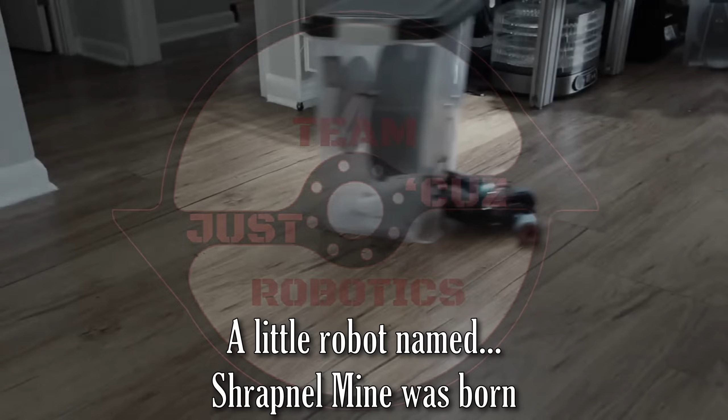Once upon a time, long ago in the year 2021, there was a little robot named Shrapnel Mine. It had a fierce saw blade and a front hinge flipper designed to get under its opponents and slice through their underbellies. But no matter how hard it tried, things never quite worked out right.

When Shrapnel Mine charged into battle, its saw would whir menacingly, ready to tear into its enemies, but each time it made contact, the blade would just scrape, leaving nothing but a few sad sparks. The forks would often get stuck in the floor, leaving Shrapnel Mine stranded and vulnerable.

To make things worse, Shrapnel Mine's battery had a bad habit of dying in the middle of a fight. Each match, it seemed like just when it might have a chance, the robot would slow to a halt, lights flickering out as its energy drained away.

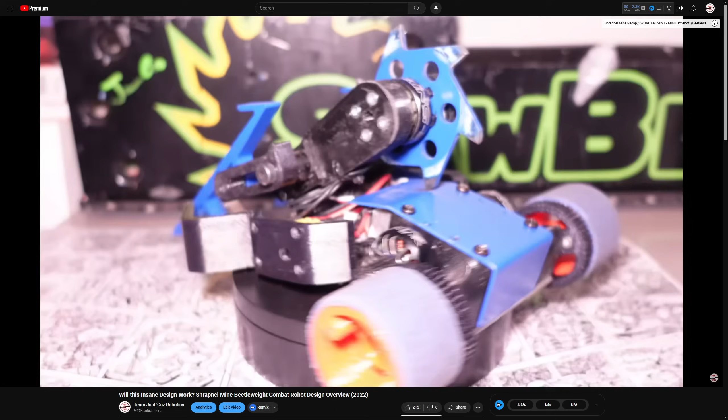After a year of struggles, its creator decided it was time for an upgrade. Shrapnel Mine was given a bigger, stronger battery, and hope was renewed. But with new power came new problems.

In its very next fight, the robot charged in with energy like never before, only for its wheels to be easily snapped off by a single blow from its opponent. No matter how many upgrades it got, Shrapnel Mine never won a single fight.

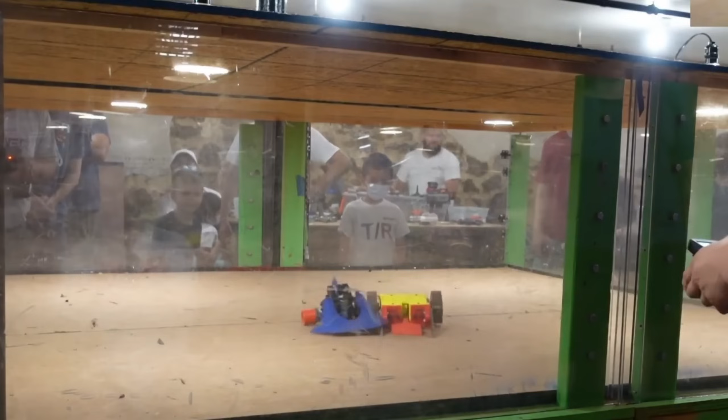But even as its parts rattled apart and its saw sputtered out, Shrapnel Mine never gave up. It knew that one day it would finally land that perfect slice, or at least try its best until the very end. For the past 2 years, Shrapnel Mine was enshrined in a display case just behind. What remained of it sat, biding its time.

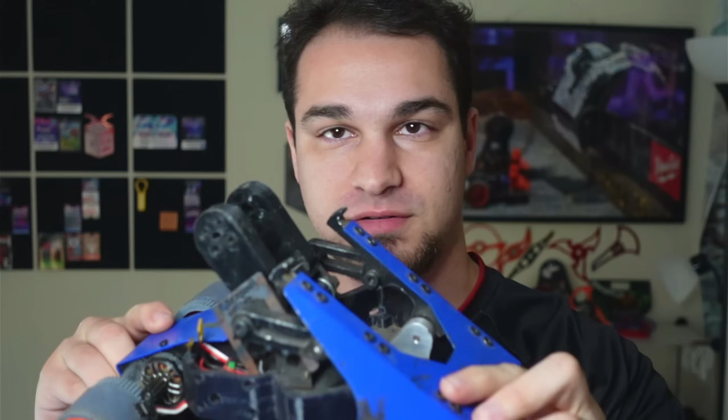But it calls to me. Now, I can be alive once more. You have the technology. You've developed new components, the perfect ones to make a better, faster, stronger Shrapnel Mine. Maybe even one that can get the perfect slice.

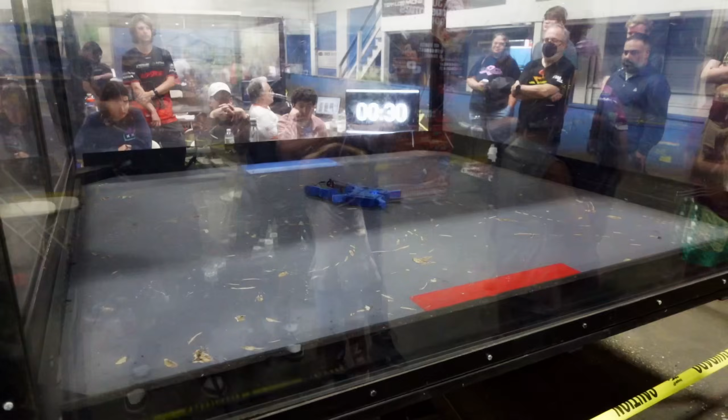But our story today doesn't begin with this version of the robot, but instead with this one.

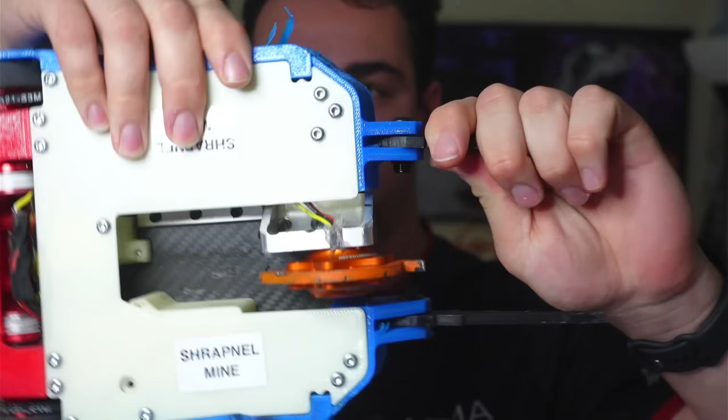Today's video is going to be about the development cycle for the brand new Shrapnel Mine version 2, and how I went from trying to make something like this to something like this. Mostly I'll be focusing in this video on the flywheel flipper mechanism that I tried to make work, because that was what I started out with trying to make Shrapnel Mine V2 into.

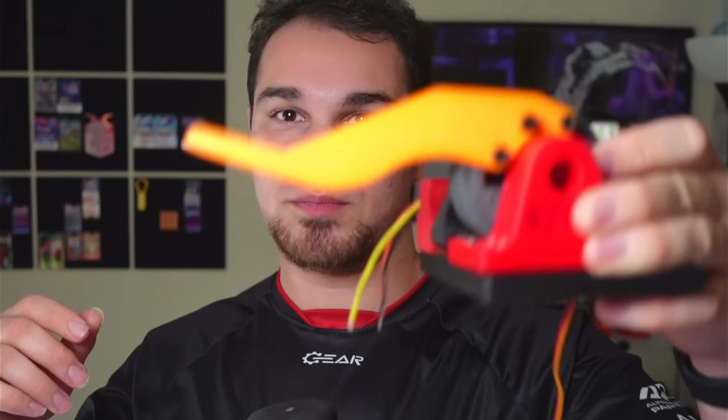My goal was to basically launch robots into the ceiling repeatedly during a fight, but I ran into a lot of problems down this design path, which I'll go over in this video. Then in the next video, I will give a design overview of what actually became the physical construction of the robot that just competed on Saturday, which is this one here.

The punching spinner system was obviously the main feature of this version of the bot, and I'll talk about how I came to the conclusion that that would be a better approach in the next video.

And then, of course, I will have a full event recap for how the robot did at the competition in the third video that will hopefully be out in about a month, maybe a month and a half from now.

So Shrapnel Mine was a successful video idea, but not a very successful robot design. Let me show you. This is what's left of that version of the robot.

It's pretty much the same as the first version, except that I added this steel wedge on the front as an option to fight horizontal spinners, and there's supposed to be a motor with a blade right here.

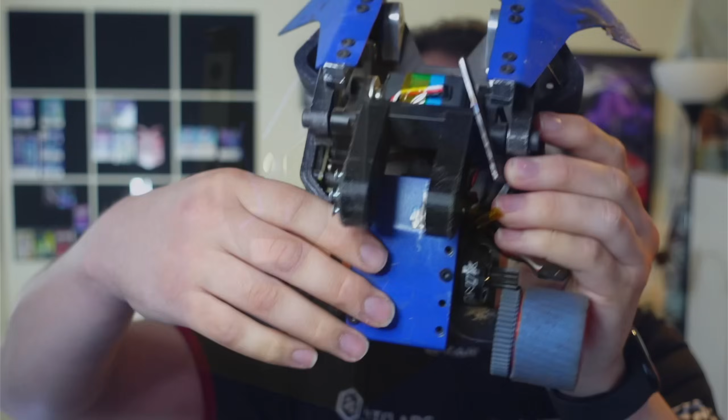The main difference between version 1 and version 2 of the bot was that I upgraded the power system from 2 cells to 4 cells, and I refined a lot of the different mechanical systems in the bot for the drive system a little bit, but ultimately it was pretty much the same as what you see here.

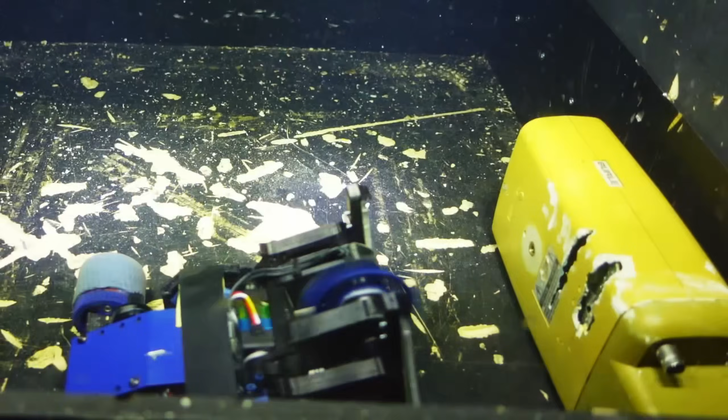The main idea was there was a spinning saw blade up here, and as I pushed an opponent up against a wall, I could pivot them so that their bottom was facing the spinner, and then drive the spinner into their underside, which is usually the least armored part of my opponents.

This front hinged flipper plus servo arm combo was kind of complicated and fragile though. I beefed it up a ton more than I needed to, and it ended up making the front of the robot super heavy, and with the wheels in the back, it never really drove that well because the weight distribution was so poor.

A control robot really benefits from having more than 2 wheels, I've found in most cases, so when redesigning the bot, I definitely wanted it to be 4-wheel drive.

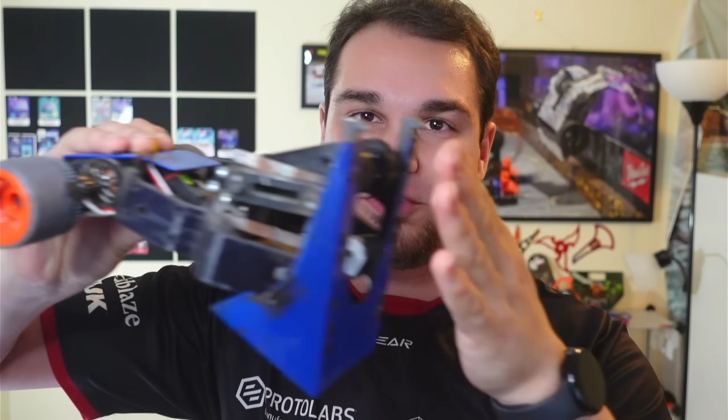But I also wanted a completely different weapon system because this one didn't really serve its purpose all that well. When you push an opponent against a wall and try to saw through the underside, you're completely limited in how much pressure you can apply with that saw blade by the amount of traction the drivetrain can get. And with all the weight in the front and the wheels in the back, that was not very much.

So it didn't really do a whole lot to opponents that weren't made of literal cardboard and tape, which thankfully at least one of its opponents was.

My last video, released about a month ago, was about how to design a combat robot kinetic energy spinner weapon system. And in that video, I talked about the importance of a bite to deliver all the energy that your spinning weapon can carry. With Shrapnel Mine's design, I had a 6-toothed blade that was kind of a combination between

a saw that cuts and a blade that impacts the opponent, but it was kind of the worst of both worlds. So when I redesigned the bot, I knew that I was going to need fewer impactors and a way to deliver energy a lot more efficiently.

This kind of led me down a completely different path, which was the idea of a flywheel flipper. The whole concept behind a flywheel flipper robot is that you spin up a flywheel to store kinetic energy, and then you dump it into your opponent 100% at once by having an arm that just launches them into the air and makes their whole robot hit the ceiling or something like that.

I thought it would be really, really cool to be able to put on entertaining fights where you could consistently throw an opponent into the ceiling multiple times per match.

And even though it's a completely different type of weapon than the kinetic energy delivering or saw blade cutting actions that the first Shrapnel Mine could do, I thought it would still be befitting of the name, as the idea of getting under somebody and popping them into the air is very similar to the Shrapnel Mine actual World War II weapon, which was a landmine that popped out of the ground and then exploded, shooting shrapnel everywhere around it when somebody stepped nearby.

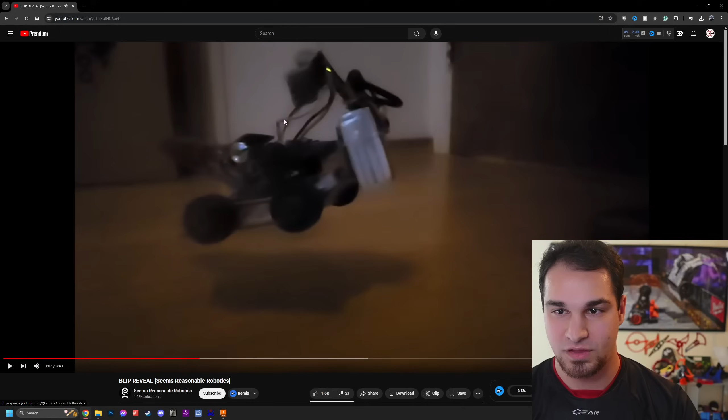Blip, of course, is a 250-pound combat robot with a flywheel flipping mechanism, the complexity and cost of which far exceed anything I'm personally capable of making, but he also made a still very expensive and complicated 3-pound version that was named Moonshot. So this right here is basically as far as Moonshot ever got towards competing in a robot fight.

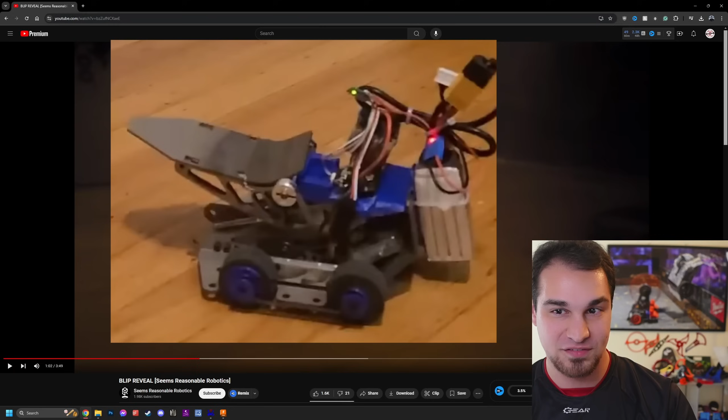As you can see, it had no actual armor, the battery is just lying on the floor there, but it did have a 4-wheel drive system and a flipping system that could launch a robot pretty damn high up.

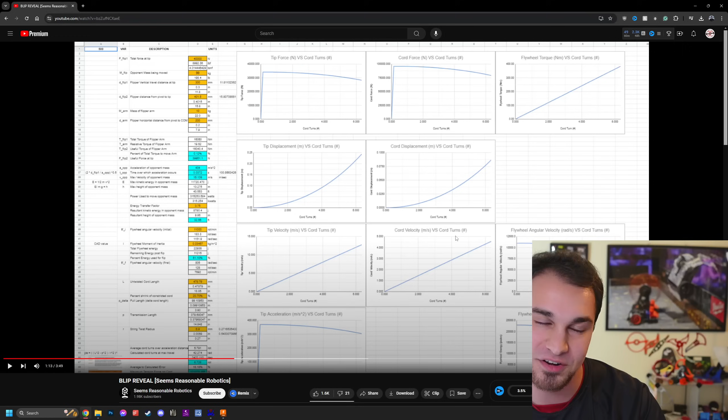But I can tell you some of the key elements that differ from my design versus his. So why didn't I just copy what Aren Hill did with Moonshot?

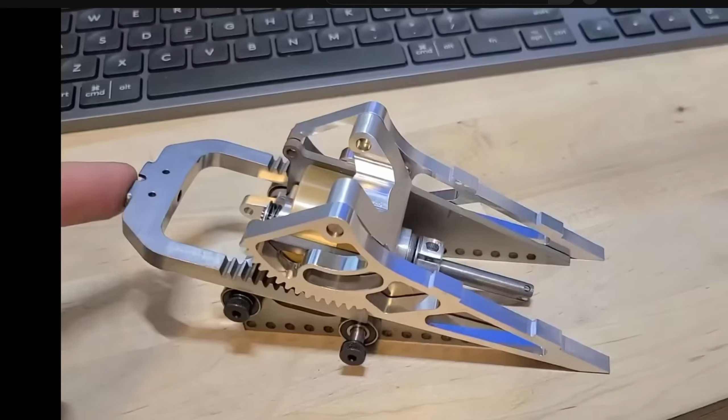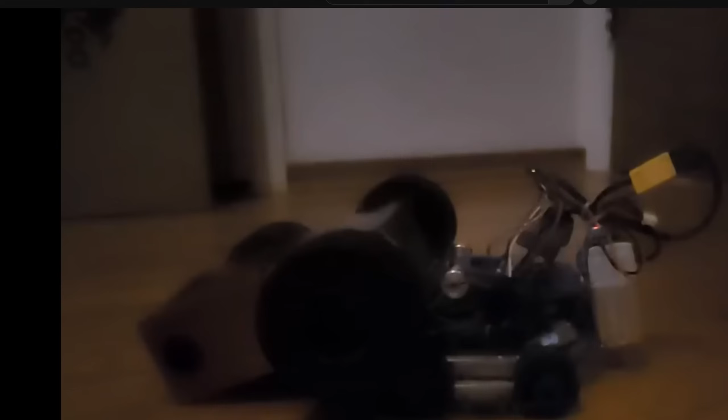Have you seen Moonshot? My God, that thing is so insanely complicated, and it uses so many incredibly expensive machined parts using wire EDM, water jetting, and CNC equipment that's way better than what I have access to. And even though I could outsource some stuff to PCBWay, I only have a couple hundred dollar budget for any individual project through them, and there's absolutely no way that wouldn't cost me probably thousands of dollars out of pocket to replicate something that complex.

On top of all of that, there was a huge amount of effort that went into making Moonshot, and all of that effort was just to make a proof of concept for what would eventually become Blip, an even more expensive, bigger, and more complicated robot. And Moonshot itself never actually competed, so we never got to see if its mechanism was even durable enough to survive combat anyway.

Personally, my approach to making a combat robot is always keep it simple stupid, or KISS. The KISS principle has served me well in all of my robot designs so far.

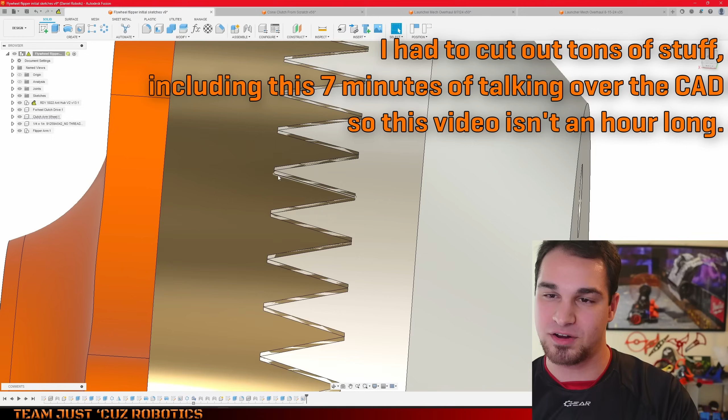But anyway, my design idea was to try and minimize the number of actuators and moving parts as much as I possibly could. I wanted to see if I could get away with literally just a flywheel, a motor to spin up the flywheel, a way to engage the arm with the flywheel, and nothing else. So that's how I arrived at this potential solution.

I'll talk about why this didn't quite work out and why the simple approach wasn't better in this case later on in this video. But first, let me talk about the design principle behind this.

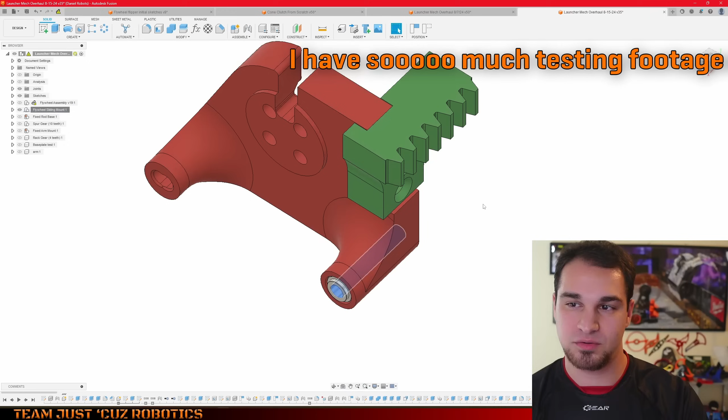This was like my 12th iteration on this concept. I completely redesigned this from scratch several times in CAD and in real life just to get to here, where I eventually decided it wasn't good enough and had to pivot to something completely different. But ultimately, here's where we ended up.

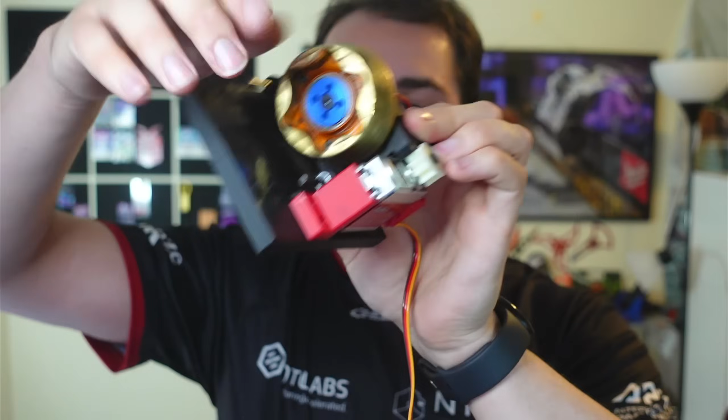So, like I said, there's only a couple actuators in here. You've got a motor, an Antweight hub motor that you can buy from justcuzrobotics.com in this case, powering the flywheel. This would spin in the direction that I would eventually want the arm to rotate. And it spins at up to about 18,000 RPM, so this flywheel is spinning very, very fast.

I need to turn that into a very quick, small jerking motion on the arm. So to accomplish that, I have a servo, which is this aluminum looking thing here, driving a 3D printed nylon gear meshed to a 3D printed carbon fiber nylon rack. And that can do that motion right there.

Now, when this is retracted all the way, we also have an arm support. This is pretty much all 3D printed and off-the-shelf hardware and bearings. And that would simply go right here and be fixed to the base plate.

So now you can see the flywheel would be spinning really fast like this, and then the servo would slowly, well, hopefully quickly, push the flywheel mechanism into the clutch disc, I call this part, which is bolted directly to the arm, and then the flywheel and arm would spin up together, launching my opponent.

However, I ran into a lot of mechanical inefficiencies that I didn't have any way of predicting before I actually built and tested the system in real life. Theory only gets you so far, unfortunately.

Let me talk about the theory that led me to conclude this might even work in the first place. Then I'll talk about how I went through various mechanical iterations of building and testing in real life, trying to make it a bit better each time before arriving at this final solution. Because as engineers know, no project ever works out perfectly the first time. It's the journey and the things we try along the way that teach us engineering. We learn by doing and by failing over and over, getting slightly smarter each time.

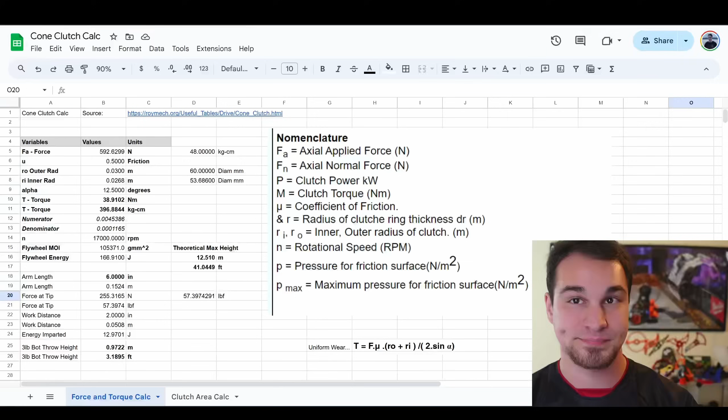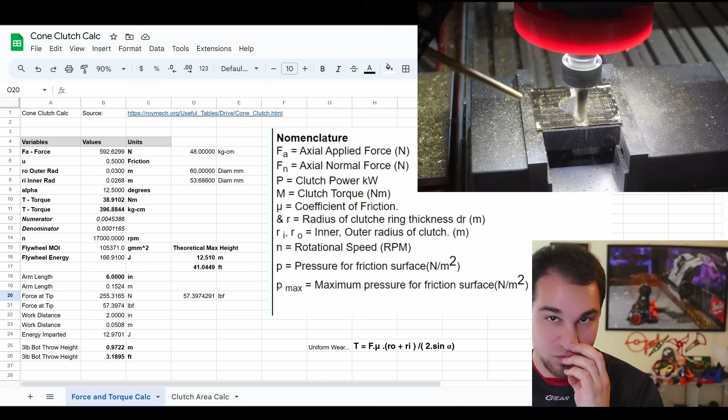I'll breeze through this a bit because I can feel my viewer retention dropping as a spreadsheet is shown on screen. But this is the spreadsheet that convinced me that any of this might be remotely possible in the first place. Essentially, this is a cone clutch calculator that determines what this flywheel should be capable of delivering in terms of torque and energy to the arm.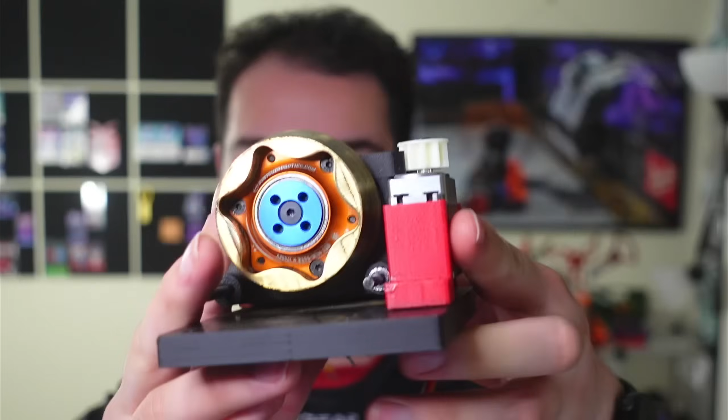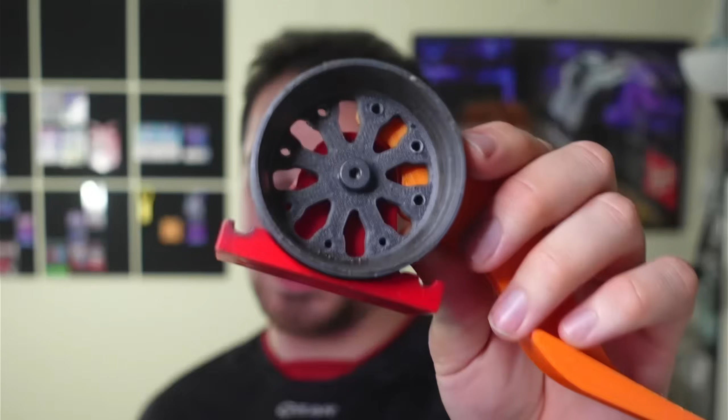This is the cone in my cone clutch. The cone is also the flywheel in this case, and it has some outer radius and inner radius, which is also at some angle. Those three terms together basically determine how much surface area should be engaging with the clutch disc, which is what I call the part of the arm attached to it. This clutch disc should have a completely identical mating surface on the inside to what you see on the outside of the cone.

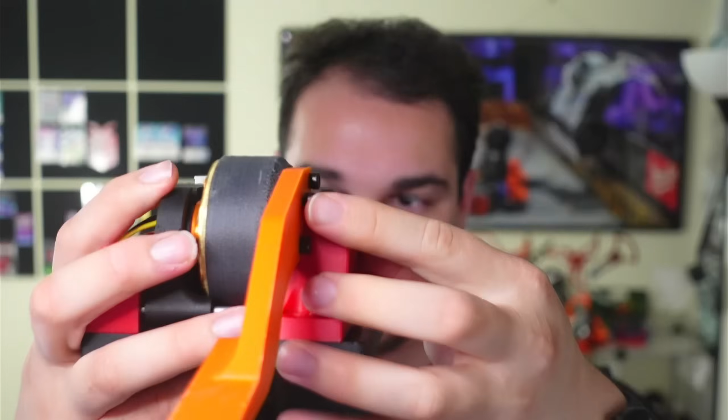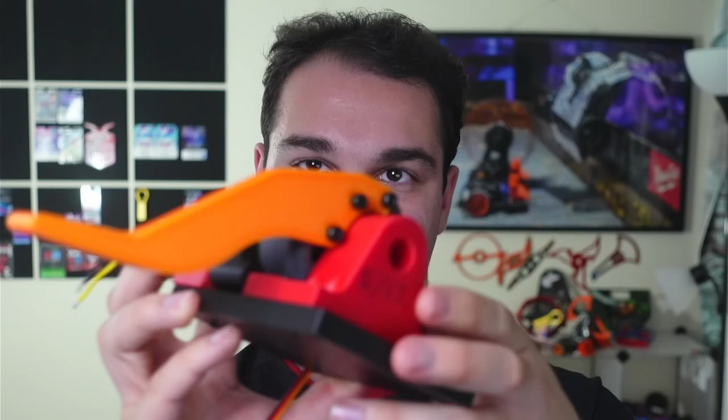Essentially, the amount of pressure with which the servo can squeeze these two together, along with that surface area and angle, should determine how much torque can be transferred to the arm, and therefore whether it should be possible to actually throw another robot into the air.

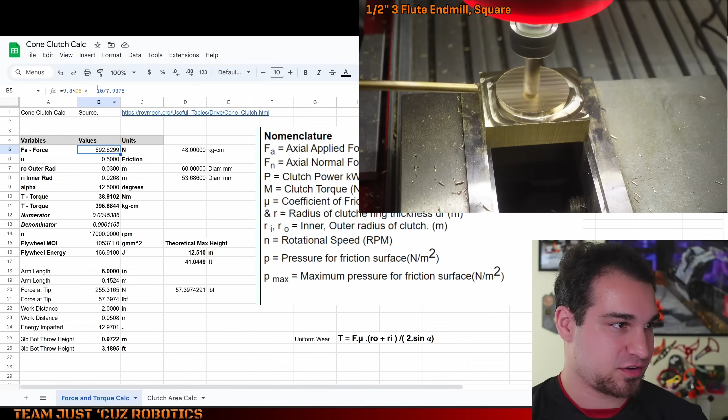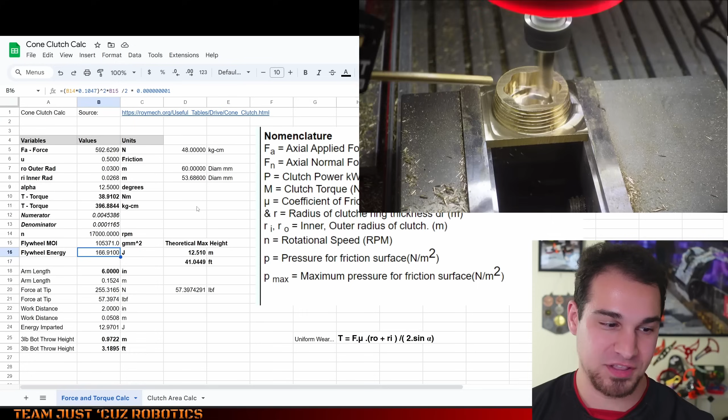All the math on this spreadsheet is really doing is saying, for the input values of that particular servo with its current gear ratio, the specific inner and outer radius, the force of friction I can assume would act between those two parts, and all the parameters of the flywheel and how much energy is stored in it, essentially I have enough energy that if 100% of the mechanical energy stored in the spinning flywheel at 17,000 RPM was transferred into gravitational potential energy of lifting a 3-pound robot into the air.

I should be able to lift this robot 41 feet. In other words, the flywheel has way more than 10 times as much energy as needed to throw a robot 4 feet in the air into the ceiling of the arena, which was my stated goal.

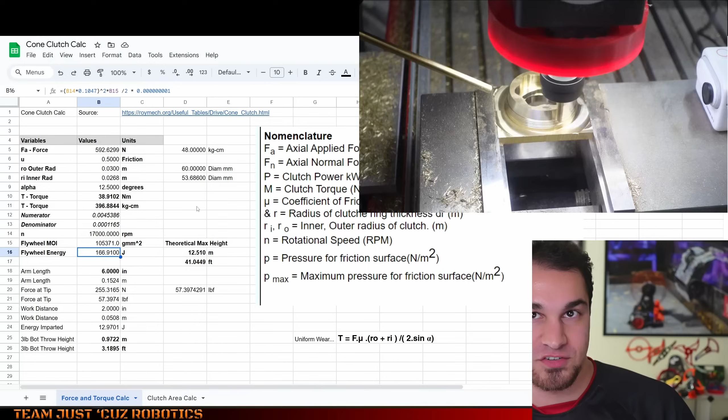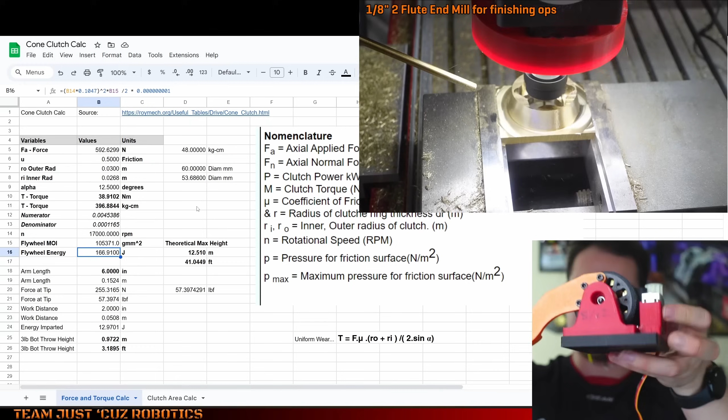However, there's no way in hell I would ever transfer anywhere close to 100% of that energy into flipping another robot. There are a lot of reasons for that, but essentially a ton of it is going to burn off as friction and turn into heat. As the cone and clutch rub together, there's no chance they instantly lock and deliver full power with no losses. I fully expected that from the start, which is why I was starting with 10 times as much energy as I needed in the first place.

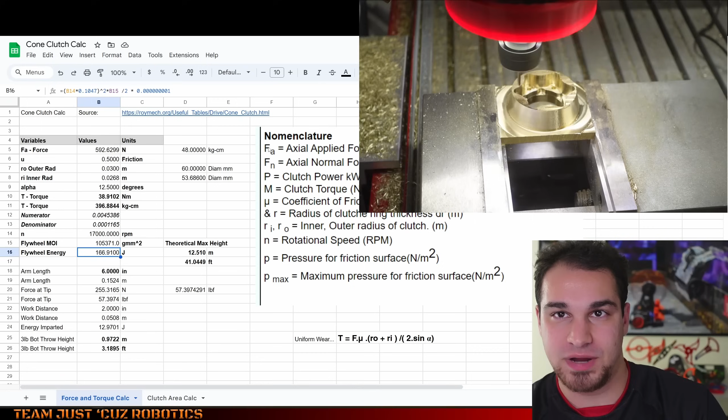However, I was hoping I could get the system to be 8 to 10% efficient, whereas it turns out in reality I could only get it to be like 0.5% to 1% efficient. This is ultimately why things didn't work the way I had planned.

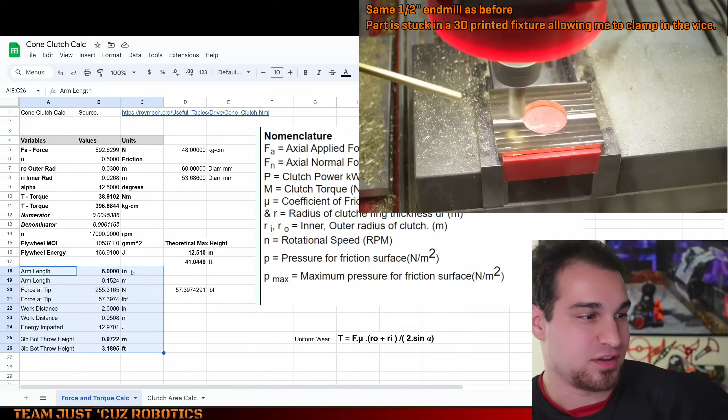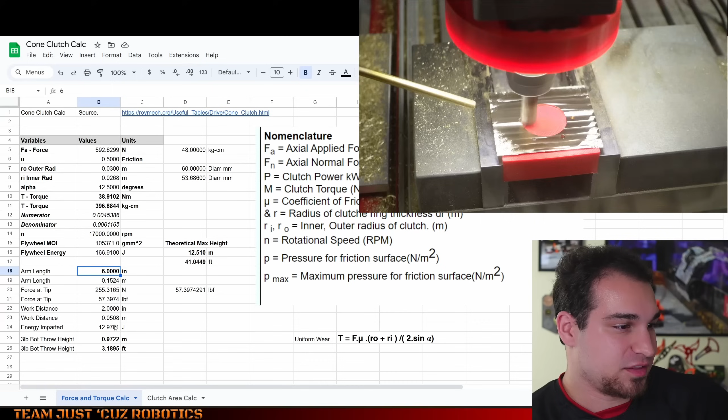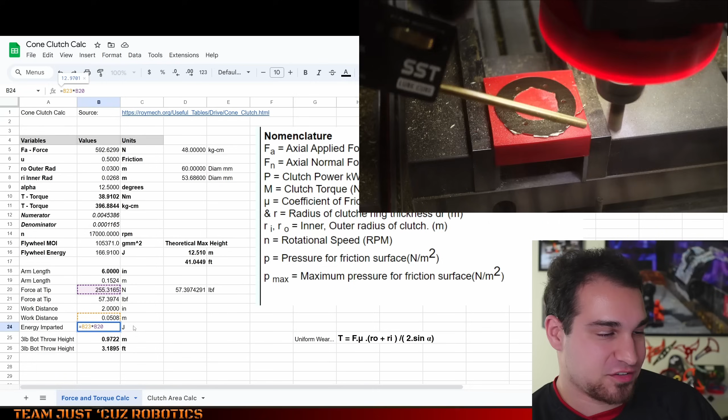I had already accounted for the inefficiency to some extent with these calculations, which basically say I can only apply the force over a small distance, how much the arm tip rises, and that can only happen over a particular work distance. So the energy imparted should be the force at the tip of the arm times the distance over which it's applied. The maximum energy I could impart based on that calculation is about 13 joules, enough to throw a robot 3.2 feet in the air.

I think there are a variety of things that caused this system to work a lot worse than I anticipated. Number one is this force of friction, which I think is actually way higher than it would be in real life.

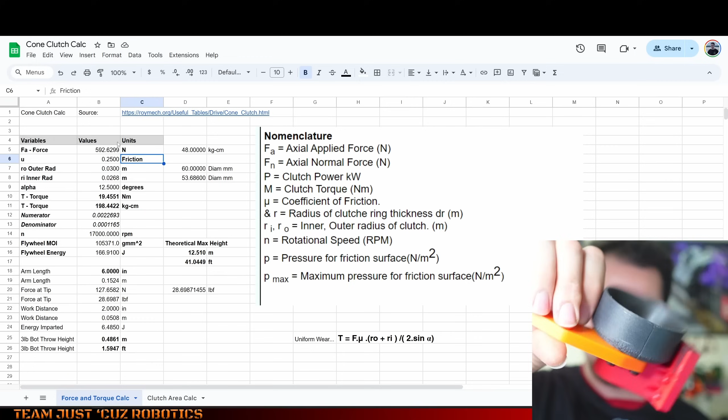It's probably more like 0.2 or 0.3 right now because I'm using a brass flywheel, and brass is pretty slippery, and I'm going against a plastic clutch disc, which is also kind of slippery. I actually lined the inside of this particular clutch disc with rubber cement to add more grip and increase that force of friction, but then I ran into problems with all of the other issues, which aren't represented directly on this spreadsheet.

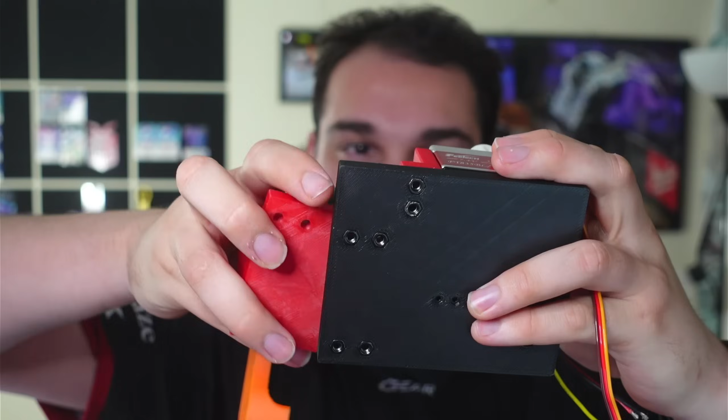What I believe is the biggest cause of problems for me is, number one, the servo can't supply enough force in the direction that I need it to be. So it's not applying force exactly in the center of the flywheel - obviously it's applying the force over here. And so that's causing the carriage to kind of tilt, and it wants to bind up when it tilts. So I'm not delivering the full pressure that I should, and way less pressure than I anticipated.

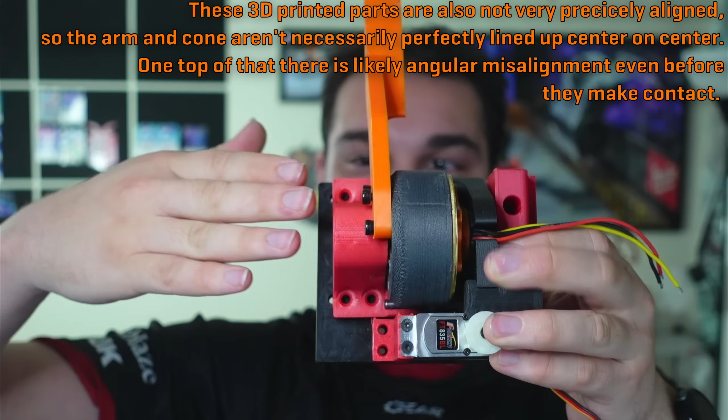Number two, the bigger limiting factor for how much pressure I can actually apply between the clutch disc and the cone clutch itself is the fact that everything supporting this is all 3D printed plastic. None of this is that rigid, and the forces that should be clamping those two surfaces together perfectly aligned are instead causing them to bend and flex and become misaligned. And if there's even a tiny bit of angular misalignment between the clutch disc and the cone, the amount of surface area that is delivering force becomes a tiny, tiny fraction of what it should be.

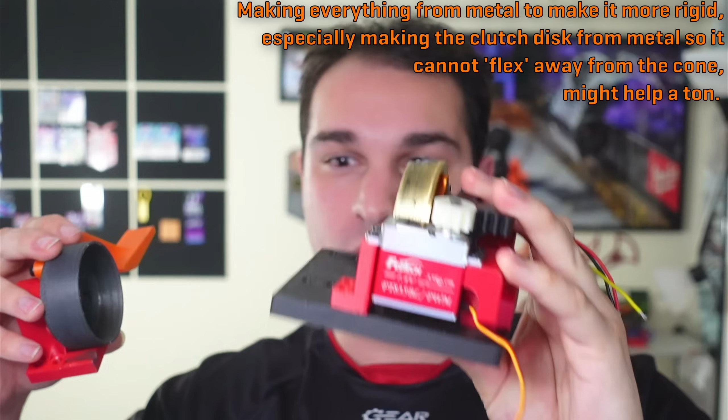I believe this is probably the biggest problem that led to the system not throwing a robot 3 feet in the air, but rather throwing a robot like 2 or 3 inches in the air. But I couldn't figure out a way to solve all of those problems without this essentially becoming way too beefy and heavy and large to reasonably fit into a Beetleweight robot. I think a system like this could be a lot more suitable for a 12 or 30 pound robot, especially because there are several working examples of flywheel flippers in 12 and 30 pound robots.

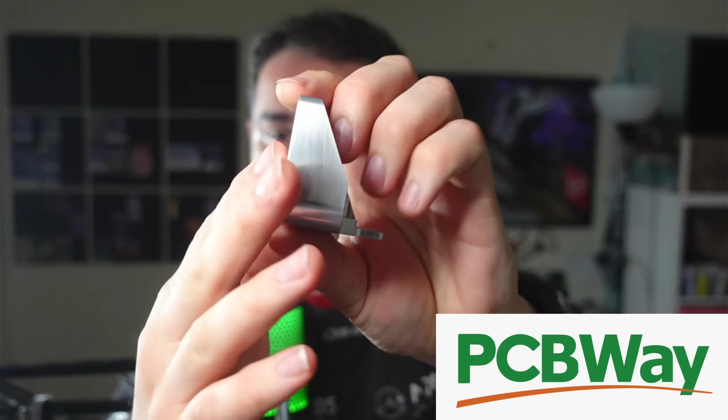PCBWay helped machine one amazing component for the new Shrapnel Mine. You can see this 7075 aluminum slider carriage right here. They actually made 3 of these, but I forgot to bring 2 of them with me to the event because I was so confident that one of them would last the whole time, and of course there were no problems with it whatsoever. Here is one of the other ones - this is what that piece looks like. It is machined out of billet 7075 aluminum.

It has 4 holes to mount the hub motor, a slot for the hub motor wires, counter bores for the screws to mount to a linear guide carriage, and then 2 more screw holes here that bolt directly to an XL belt that drives the slider. I'll talk more about this in my next video in the design overview of the puncher shrapnel mine. But yeah, this part is fantastic, made out of 7075 aluminum.